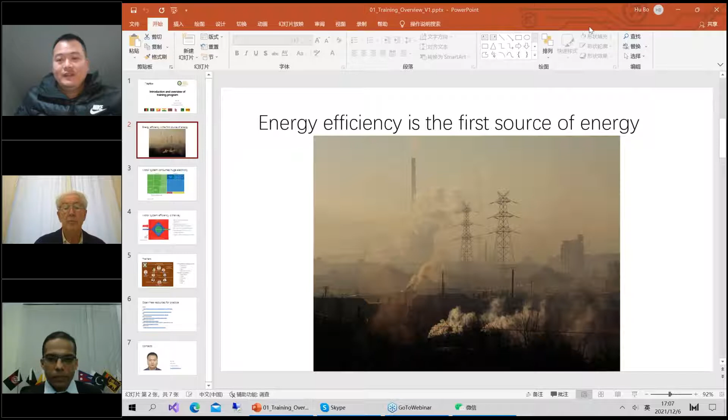That is, energy efficiency is the first source of energy. Previously energy efficiency was considered something different, but right now we consider energy efficiency the first source of energy, especially in the EU and also in China, in the policy context. Energy efficiency has been given high priority in the policy context. I know that there are some officers from the South Asian countries joining us. I hope that this can also be good in your future work.

Second is why motors, because motor systems consume huge amounts of electricity. This is research from UNEP's U4E program.

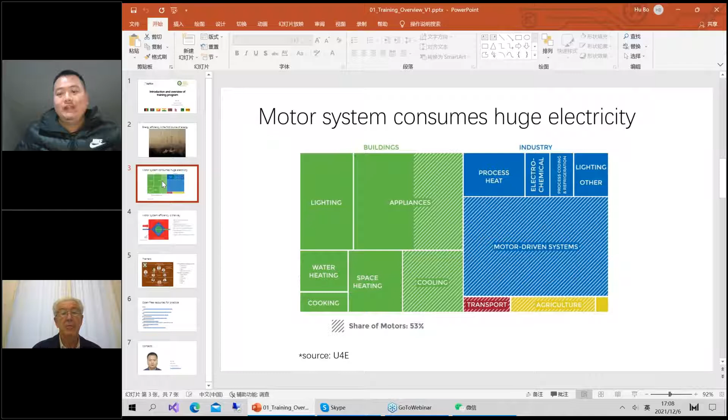The motor system consumes more than half, 53% of the global electricity. I think this graph will be shown again and again by other speakers, by other trainers. They will show you how important the motor system is, because it consumes such a big share of the global electricity and also energy. Second, this graph is actually from Conrad, whom I cited at the very beginning. I found it in his presentation; he does not show this graph, but I think the most important point is that motor system efficiency is the key.

Based on this concept, because I don't know the background of the trainees from this South Asian region, I designed the topics or subjects for 5 days. The first day is for the system approach. The second is the digital pump demonstration and training. I know that everyone has already got the schedule, but I want to explain to you what's behind it, how we designed this training schedule.

The second is the pump demonstrator. I'm involved in this development process. I want to show you the front of the demonstrator, but also something behind it. The third is for the VFD control and also digitalization from, I think, the University of Bern. And they have Vitili, the IEC TC member from Switzerland, who is quite experienced, an expert in this field.

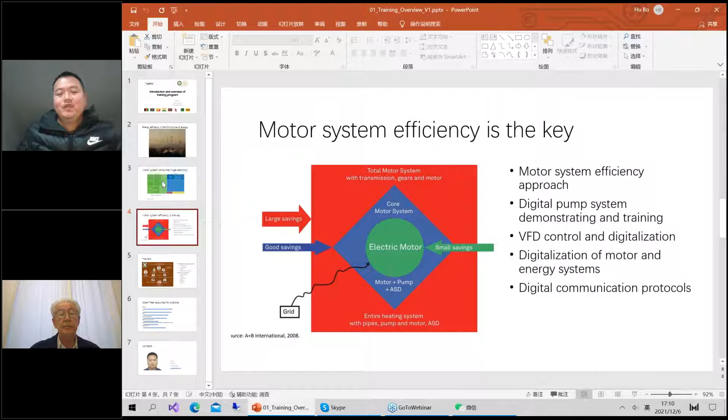And the fourth day is my solo day. So I will give you some in-depth insight into the digitalization of motors and also other IoT systems, and some industrial communication protocols like Modbus, and also OPC UA. I think the final day could be digital communication protocols with an ABB expert, because ABB invented a very creative solution called ABB Ability. I think we can learn from it.

That's the trainers' profile. I think Tula and also the director already mentioned that we have a bunch of trainers from different backgrounds. We have diversified institutes: experts from universities, from companies like ABB, from NGOs like CLASP, and also research institutes like China National Institute of Standardization, and also Topten, which is an NGO or technical consulting service company. We invited a bunch of trainers from all backgrounds.

I want to highlight that Conrad and also Andrea work for IEC, the TC committee. I think they are the front runners in this field for motor efficiency and international standardization. And also China National Institute of Standardization; they are quite pioneering in this kind of process. Of course, we have speakers from a lot of countries. I don't want to repeat it, but we have speakers from China, from different time zones, from morning to afternoon or even some evenings. I think that's a combination, and that's my perspective of the training.

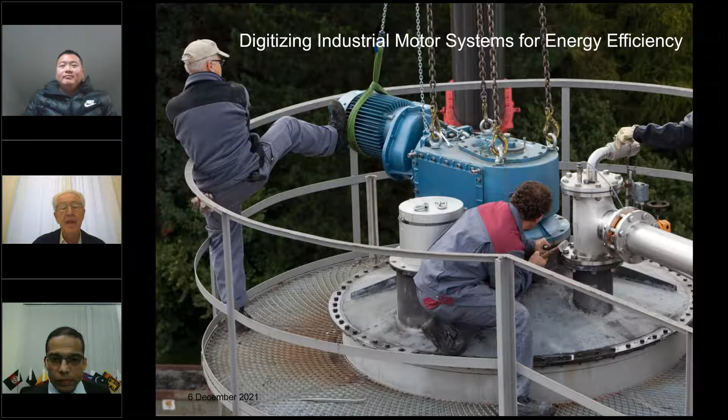My topic is the introduction to the 5 days training. It's under the title of Digitizing Industrial Motor Systems for Energy Efficiency. And you can see on my introductory slide a motor and pump installation being mounted on the top of a big purification plant. Now, I chose the title Efficient Electric Motor Systems, Overview of Motor System Energy Efficiency Improvement. And as I said, my name is Conrad Brunner. I'm an energy efficiency advisor since many years. Therefore, I have many gray hair, and I'm based in Zurich, Switzerland.

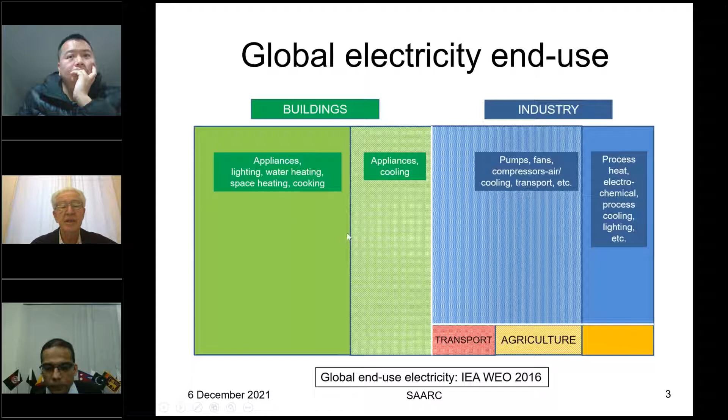This is for you to understand the use of electricity worldwide, global electricity end use. In the graph, you can see on the left side a part which is greenish, which is the electrical energy consumption in buildings. On the right side, you can see a part which is bluish, electricity consumption in industry. And below, you can see a smaller part in red, transport energy use, and agriculture, a little bit bigger electricity use. The big use is in buildings, in appliances for cooling, and in industry for pumps, fans, and compressors, and for process heat.

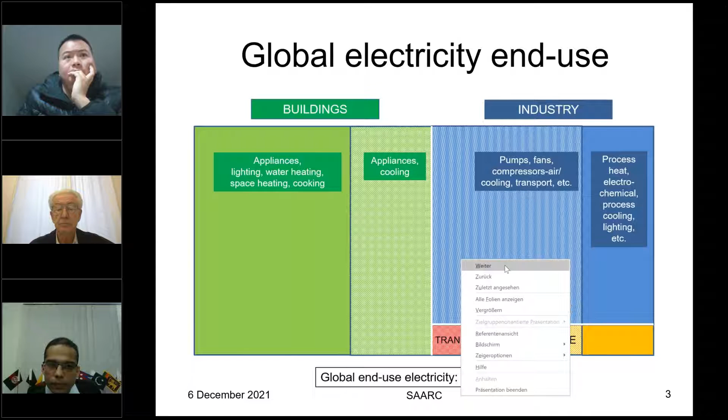When you look at electric motor systems, you can see within the dotted red square, this covers the part of the buildings which is appliances in cooling. Every refrigerator, every air conditioner has a compressor, and the compressor is driven by an electric motor. It covers a large part of industry with the pumps and the fans, the compressors for air and the compressors for cooling, and mechanical transport movement in industry. And it covers a large part of electricity use in transport and a part of the electricity used in agriculture.

Now, the red dotted square, according to research done by the International Energy Agency, is 53% of the global electricity use in the year 2016. I don't think that this number has changed. This number can be different in different countries. It will be higher in very industrialized countries. I think the number in China is up to 56%, and it is lower in countries which have a larger share of services. Then it might go down to 45%. I think each of your SAARC countries have around 50 or 53% of electricity used for motor-driven systems.

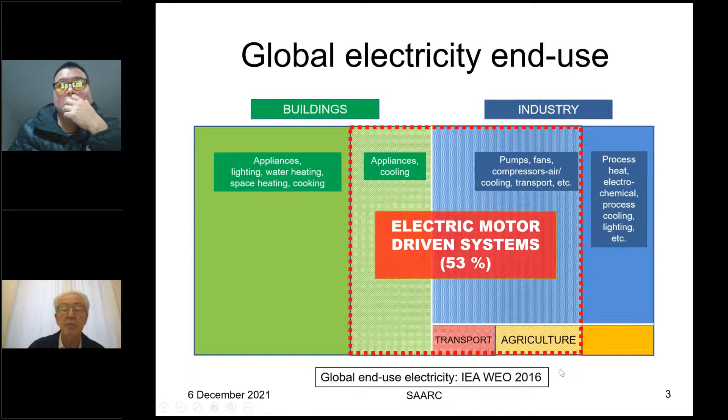This means, of course, motors are the big chunk of electricity to be used, and motors are the big topic once energy efficiency is the main topic. This doesn't mean that we shouldn't talk about lighting. This doesn't mean that we shouldn't talk about electrochemical and process heat, but for today, I think we have chosen the big chunk, the motor-driven system, as the topic.

I've said already that 53% of global electricity is used for the motors, and the last number is important. I think Rolf Tieben will then go into more detail. When you just look at industry, the share is about 60, 70 or more % for electricity used for motor-driven systems.

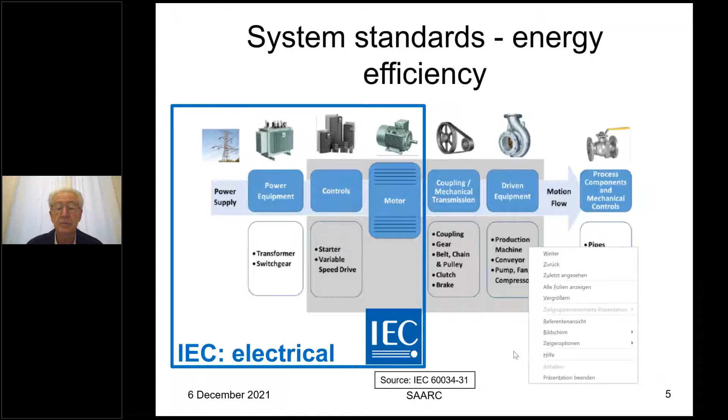Therefore, a bigger machine is always more efficient. You can also see that the differences in the efficiency from these four different classes is very large on the small side and only a few percentage on the high side. I want to explain them to you.

The red line on the bottom is the IE1 standard efficiency. These data are all based on a 50 Hertz supply, which I think is also very typical for the SAARC region. The yellow one is the IE2, the high efficiency motor. That was the standard until about the year 2000. And then the green one is today's standard for a premium efficiency motor. It's called IE3, premium efficiency. You should keep that in mind.

And then the blue is sort of the REACH standard, which starts to come into the market in Europe and in the US, and maybe slowly also in the Asian region. This is called IE4, super premium efficiency. What the curve shows is that on the lower end, in the 0.1 kilowatt area, the difference of efficiency of the four classes is from 50% to 70%. That means a 20% gain in efficiency. And then on the right side, you can see from the IE1 to the IE4, you have something like a 3 or 4% difference from the motors.

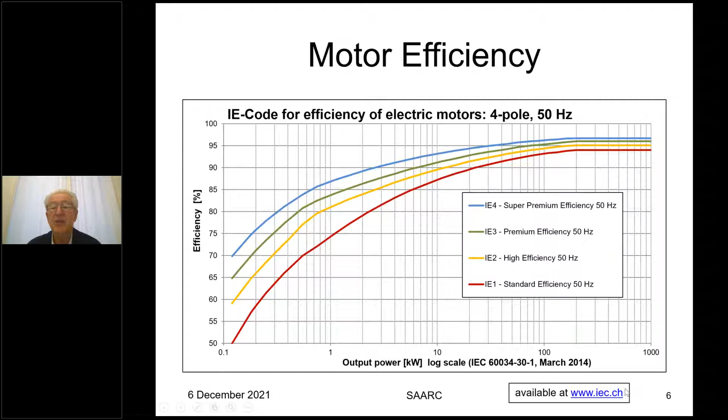And you can see, I'm sorry, I'm always jumping a little bit. You can see that at the highest level, the European Union and the UK, for a small fraction of the motors between 75 and 200 kilowatt, have announced from next year, 2022-23, to have IE4 already as a minimum requirement. That's a breakthrough in energy efficiency requirements, and I think this will help other countries to move up there in the next couple of years quickly.

And then you see a long list of countries who have adopted IE3, the premium motor, as their minimum performance standard, among them Canada, Mexico, USA, South Korea, the European Union for the smaller sizes, Switzerland, I'm proud of that, Japan, China, Israel, Singapore, Taiwan, Brazil, Ukraine, Egypt, Turkey, and Saudi Arabia.

So far, I don't see any of the SAARC countries in this group, sorry to admit. And then in the IE2, the lower level of efficiency, it's called high efficiency, but today we call it lower because this is the premium now. We have Australia, the European Union for the very small motors between 0.12 and 0.75. We have Chile, China, Peru, Colombia, New Zealand, Israel, the Eurasian Economic Union, India, and Ecuador. That means only India, if I'm not wrong, in this whole list is in the minimum requirements for motor system and only at the IE2 level.

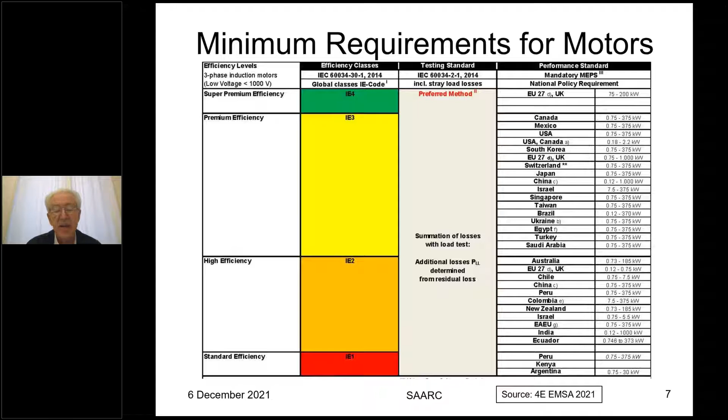the cheaper motor. And we also noticed in all countries in the world, this was like that in the US, who started the minimum requirements. It was like that in the European Union that followed. Only if there is a mandatory level for minimum requirements, then industry users will buy the more efficient motor. Otherwise, they tend to buy a cheaper motor, which is not a benefit for the future use of electricity.

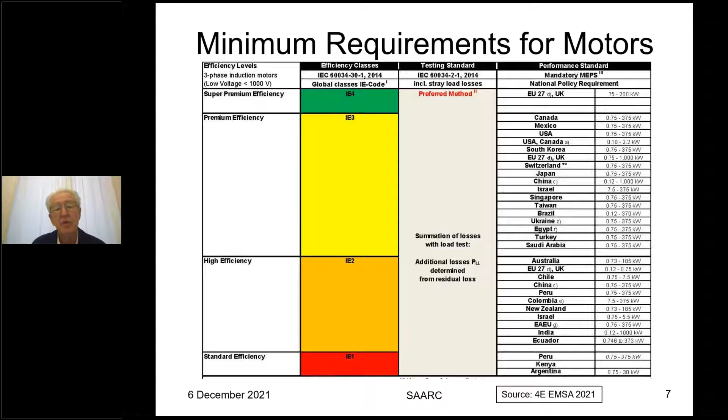Now, I want to give you 6 points that I feel are key for energy efficiency in motor systems. And this is an overview, and I'm sure the following presentations by my colleagues, the other trainers, will go into much more detail. But these 6 points are sort of the strategy behind getting efficiency for industrial motor systems. I call them industrial because the minimum motor size we talk about is 0.1 kilowatt, and it goes up to 1,000 kilowatt. But we are not talking about a very teeny 2-watt ventilator, which I have in my computer.

Point 1, design for necessary demand. Necessary demand means the pressure and the flow of your ventilation or your pump, the capacity and the temperature you have to reach. All these parameters should really be calculated or measured, and you should design your system only for the necessary demand. This leads to point 2.

If you find a machine in operation that is too big, too big means it will be operated most of its time in partial load at 50% of the possible output power, or even 20% or 10%. If it is run at lower than optimum load of the system, then the efficiency is lowered very much. Therefore, point 2, downsize all components to actual demand. Not only the motor, but also the converter, if you have one, or actually also the pump or the fan. All the components should meet actual demand, which I call necessary demand also, and then they operate most efficiently.

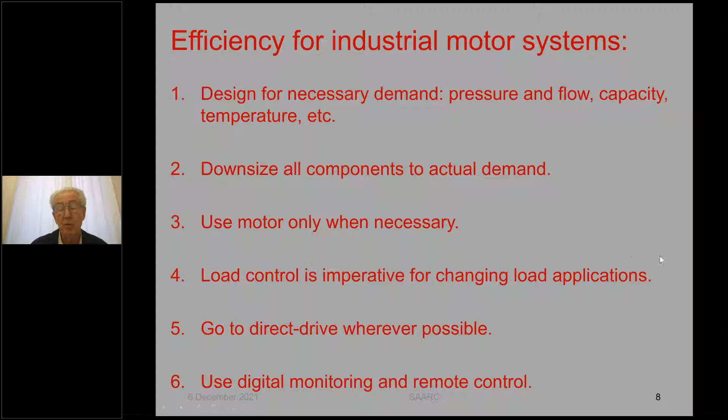Now, the good news: when you do what I say, point 2, downsize, when you use point 4, load control, when you use direct drive, point 5, you save a lot of money in the installation. Your new motor system becomes smaller, more compact, and is actually more efficient. That's what we want. Now I quickly run through all the typical applications.

This I want to show you so that you are not blinded when you go to visit industries. We visited this factory some 10 years ago, and we were surprised how nicely the motors and these cages and the pumps were presented. We found they were just freshly painted. Then we looked at their rating plates, and we found that they were produced by BBC, and the company BBC went out of business in 1988. That means these machines are over 30 years old.

They should be replaced, downsized, everything I mentioned in the last slide. They look nice, they can be recycled. Their steel can be recycled, their copper can be recycled, their aluminum can be recycled. 98% of their equipment can be recycled, and they can be replaced by smaller and much more efficient systems. Don't be blinded by nicely painted material.

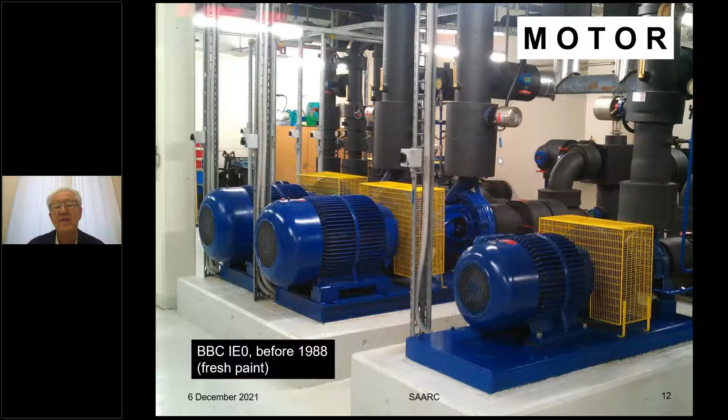Now, let's talk about the new world. Let's talk about everything which is digital. I want to call them digital motor systems, and I want to mention 4 different elements that could be in this framework of digitalization. The first element is condition monitoring. This has been done for a long time, and the goal of condition monitoring is to avoid a system failure. You want to be informed quickly whether your system performs 100%, whether it's on or off by a failure, or it shows already conditions that will shortly lead to a failure.

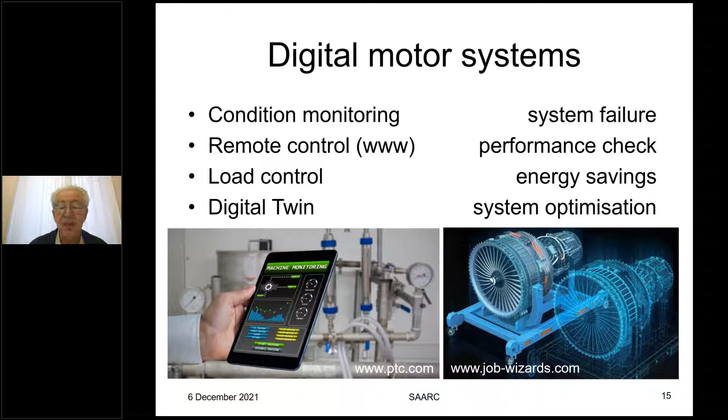This is your machine, physical, mechanical, electrical, and this is what you have on your computer. Not just a drawing of the system, but a twin in the sense that you know all the parameters of the machine. And if there is something, I'm sorry, I jump back and forth. If you have something that you don't want to have, then it's possible to immediately go at home, define where the problem is, and then jump to the actual machine and do the improvement which is necessary.

Yes, I have to go to full screen again.

So, next one is, here I'm showing you some types of digital sensors for motor monitoring. All the big manufacturers, I show you only the Brazilian from WEG, the Swedish from ABB, and the German from Siemens. All of them propagate digital sensors for motor monitoring. These are typically small boxes like this one, which is fixed on the outside on the cast iron stator. Here it's a flat box, which is mounted here on the side, and here it's a little oblong box,

which is mounted here. All of these sensors can easily record the temperature of the machine, the vibrations, and the operating time. That means on or off. Maybe I say, because all three companies are trying to reach that level, they can also check and record speed and torque of the machine. That means the actual load condition the motor is operating. And they do that by monitoring through the stator the actual electric or magnetic flux that is within the machine.

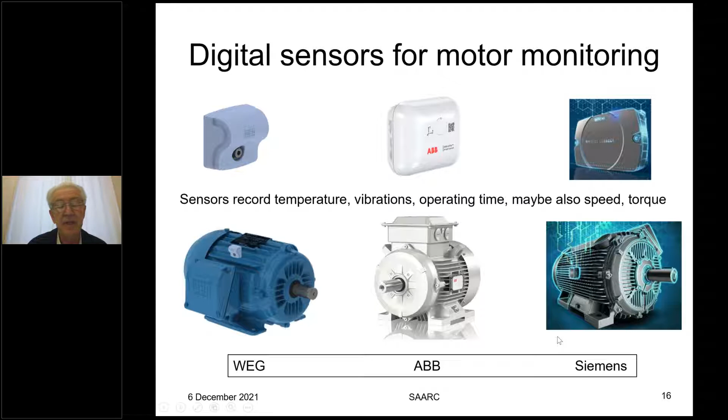All these sensors have a capacity of storing the measured data and then to relay it through the World Wide Web or through any kind of device, any kind of a system, to a central operating center where the data of performance of each of the machines can be analyzed and monitored and used and the situation improved.

Now, I want to quickly tell you what I call the number one case. The number one case has to do with the economy of much more efficient motor systems. The outset is for me any 0.1 kilowatt to 1000 kilowatt nominal output machine. It stretches the whole horizontal axis of this efficiency diagram. And it's not important. It could be a pump, a fan, a compressor, anything that rotates. That's sort of a general appreciation of what happens when you make efficiency.

Then the machine at the outset, in 90% of when we go to factories and make factory audits and try to help the owners and the operators to improve their systems, we see oversized machines. Rolf Tieben will show you some results from our analysis. We show a high degree of machines operating with fixed speed. We see a lot of gears and a lot of V-belts. And we see, of course, an assembly of current market components.

Now the system improved. I summarize the elements I've already mentioned before. You can, by measuring the performance of the machine, downsize it to the necessary level. You can introduce adjustable speed by using a variable frequency drive. We can go to direct drive by eliminating gears and belts. You can get efficient components, and you can start to use, which is now the new technology in the digitizing age of motor systems, remote control.

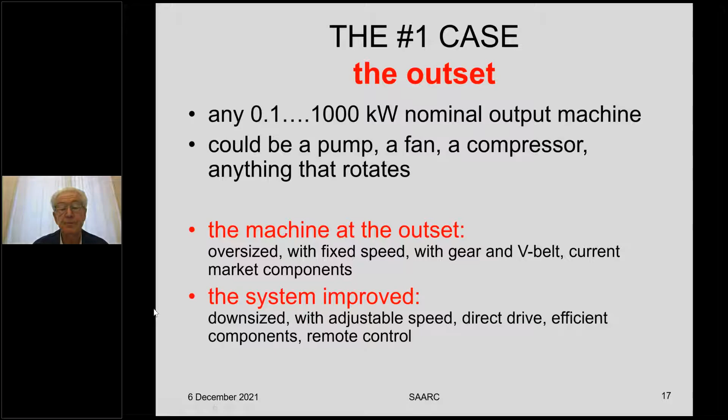Now, what does it mean? The efficient motor system means, number one, supply meets demand. Finished with oversizing. Finished with this fear that your motor will eventually not be capable of reaching the nominal required load. Oversizing is an old-fashioned, traditional approach from the time when, one, motors were very much prone to overheating and to catching fire or to burn and destroy themselves, and at the same time precise calculation or measuring methods to really size a machine appropriately were not available.

Today, the motors run much cooler, they don't overheat, they don't burn, and you have all the tools to really define the demand. Second, time of use, run only when needed, not at night, not at weekend if you don't use it.

Number three, many of these more advanced systems have standby losses. The standby losses come from motor controls, like from the variable frequency drive, from heating part of the oil of the motor and the gear. Many other things have standby losses, and especially in smaller machines, this can be a considerable part when you operate only 1,000 hours a year, and you have 7,760 hours standby. This can be more energy wasted than energy used during operation. Number four, motor connects to pump or fan directly. This is certainly an imperative for new systems.

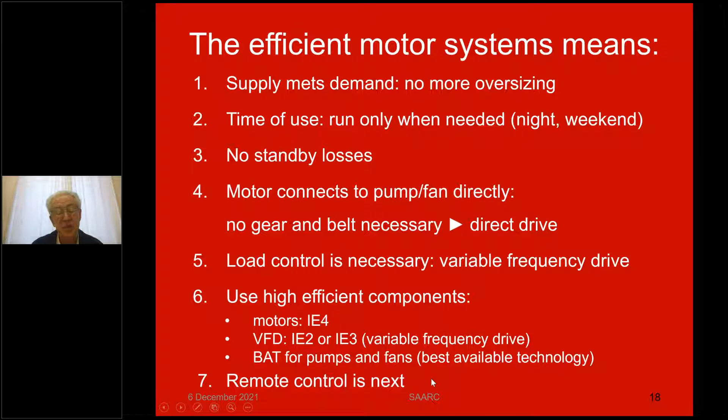Now I want to touch a final subject, which is not so important in Europe. It is very important in Asia. It's a question of repairing an existing system versus buying a new motor. I have tried to summarize all the discussion points for the repaired motor on the left side and the new motor on the right side.

A repaired motor goes into repair maybe every 50,000 hours, maybe before. It goes into repair because the bearings are not good anymore, or because you have some problems in the winding, electrical problems, heat problems, insulation problems. What do you do when you repair a motor?

First, you have to dismantle the motor. That means you have to take it out of where it actually is installed. You have to dismantle, rewind, and assemble. Maybe for this process, you have to ship it to a qualified lab and a workshop. And this whole thing takes some days or even weeks until you get your motor back, rewound, nicely greased, and back into operation.

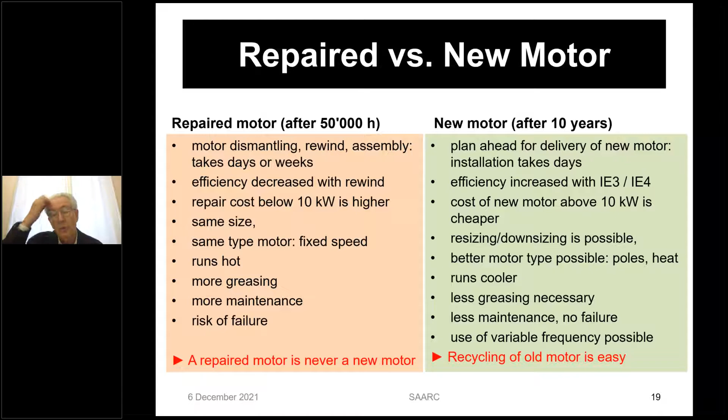Therefore, we recommend, especially for motors below 10 kilowatt, to always start with a new motor. And the last line is, when you throw the old motor out and buy a new motor, the old motor can be easily recycled. Everything you have in the motor is recyclable, except maybe the paint. 98% of the motor can be easily recycled.

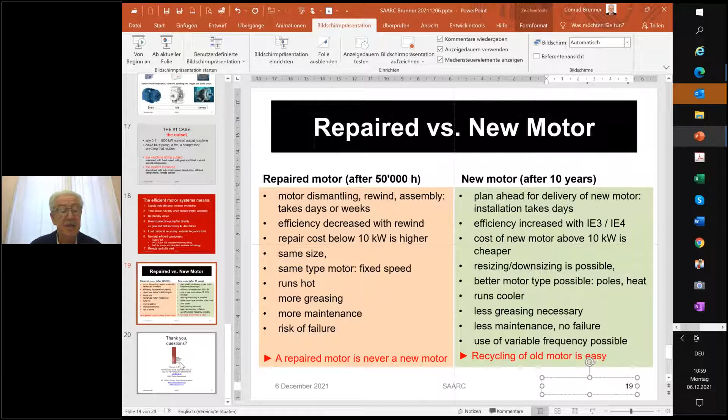Thank you, Conrad. Thank you, Mr. Brunner, for a very excellent presentation. You highlighted many important and basic things regarding motors and efficiency. Some of the points you mentioned were the industrial flow process and the interlink between the electrical and the mechanical components, and then you talked about the national policy requirements. Then you highlighted the six basic points or strategies required for efficiency in industrial motor systems.

Then you covered digital motor systems and why they are needed, like condition monitoring, remote control, load control, and the digital twin. Then you talked about digital sensors for monitoring. So it was very good. I think the participants also enjoyed it a lot.

So I have a few questions over here. Let me. Yeah.

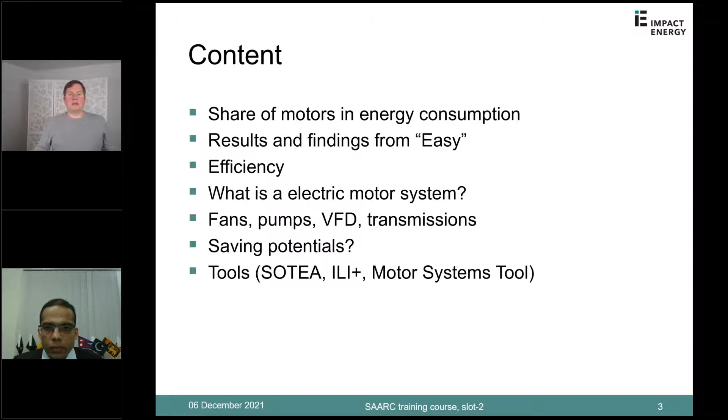We will also define what an electric motor system is, where it starts, where it ends, and we will talk about different applications like pumps, fans, VFDs, and transmissions. And we will see how big the saving potentials of all these components are. In the end, we will have a look at the SOTEA and ILI+ tool, and I will show you the motor systems tool.

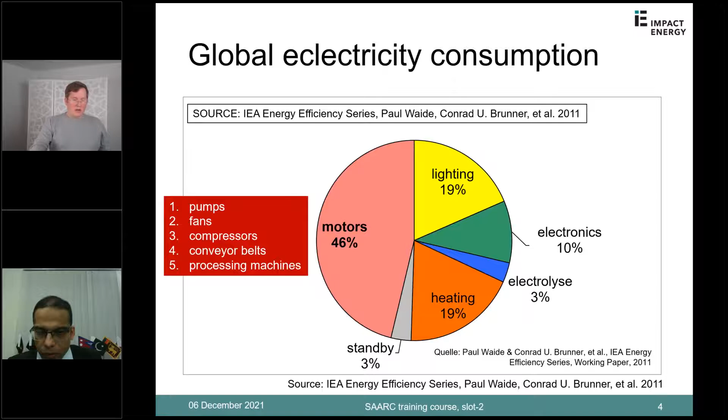We had a closer look at motors in industry in Switzerland. We analyzed 25 companies with a total energy consumption of 691 gigawatt hours per year. And we found out that 606.7 gigawatt hours of these total 691 were consumed by electric motors. In percentage, this means 87.8% of the whole energy consumption was used by motors. Only the last 12.2% was used by lighting, communication, canteen, and ohmic resistance like heating and so on. So the far biggest share of the energy consumption was caused by motors, and that's why motors are so important to look at closely, analyze, and optimize.

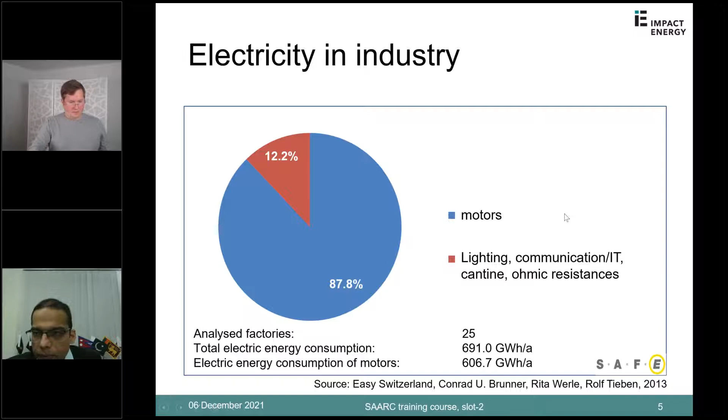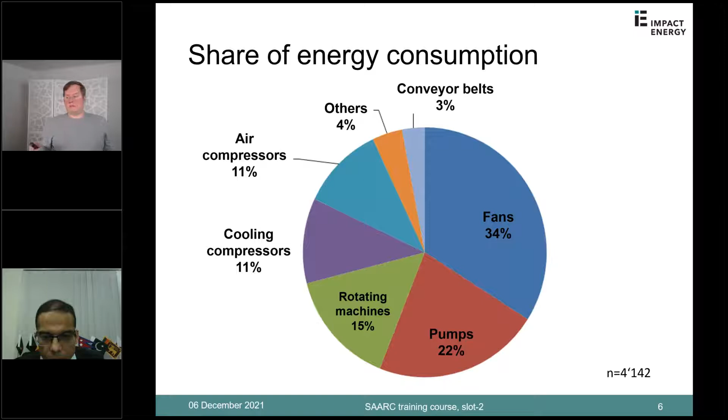So we did some analysis in Switzerland, and in total we analyzed 4,142 motors. These motors were split into several parts: 34% were fans, 22% pumps, 15% rotating machines, 11% cooling compressors, 11% air compressors, and 4% others. We had a closer look at these 4,000 motors and checked the nominal power, the average load factor, whether they use a VFD, the age of the motors, and so on. I would like to show you some findings from these analyses.

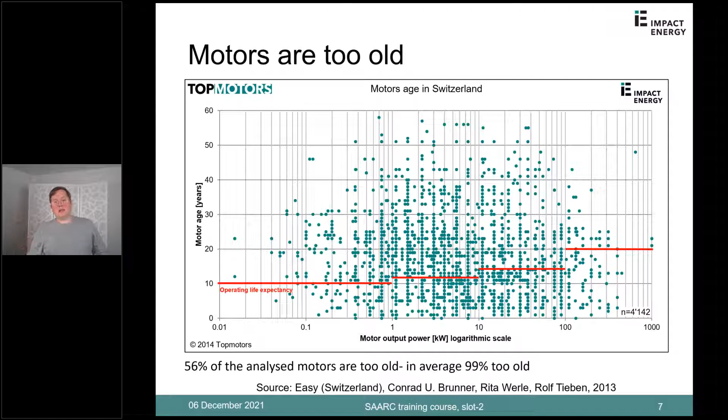So this means if you're planning a motor system, you expect it to work or to live for the time the line shows. So the small motors are expected to operate for 10 years, and afterwards they have to be replaced. The little bigger motors, 12 years, 15 years, and the big ones are expected to operate 20 years. So every dot which is above the red line is already older than its expected lifetime. As you can see, we have several dots with 30, 40, even 50 or more years of age.

So this means the motor is running day by day as it was planned 20, 30, 40 years ago. It also missed the technical development in motor technology and application technology, was probably rewound several times, had a lot of repairs and maintenance and so on. So the actual efficiency of the rewound, repaired, maintained motor today is probably lower than its nominal efficiency when it was bought 30, 40 years ago.

The total conclusion we found out was 56% of the analyzed motors were already too old, which means above the red line. And we had a look how much they were too old, and on average they were 99% too old, which means they are twice as old as they are expected to become. So if you sum it up, you can almost say almost every second motor was twice as old as it was expected to be.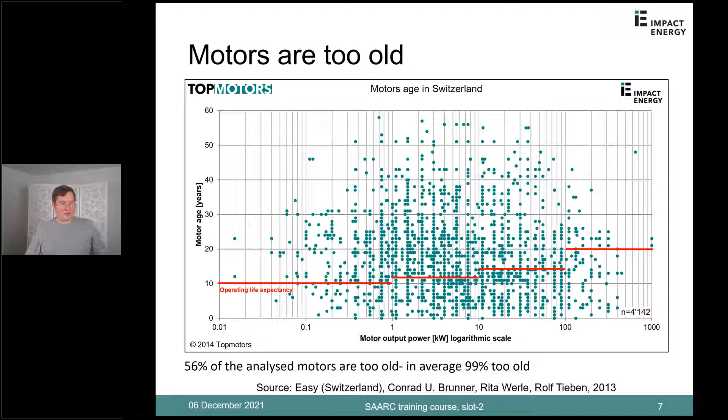Also, it makes no sense to use a modern new VFD and put it on an old motor which is 30, 40 years old. You have to check the application, the process. You have to resize and arrange all components to each other.

And if you just take an old motor, which is 30 years old, and add a VFD, you will probably get problems with the insulation. Old motors have weaker insulation in their windings, so the VFD can cause problems and short circuits in the winding. So it's never a good idea to just add a VFD to an old motor. It's always a good idea to take a system approach.

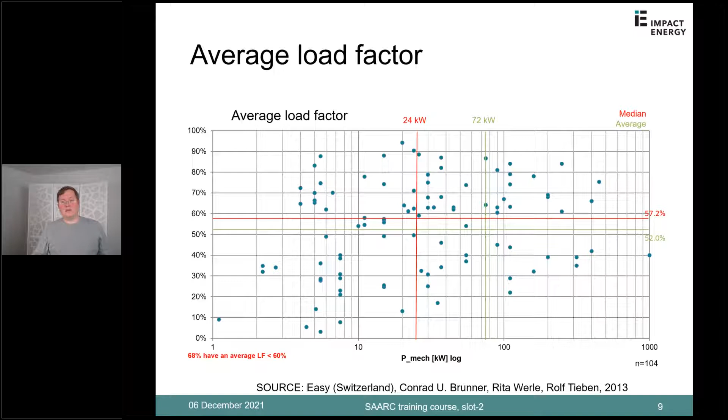So if you start with a system approach, I will explain later what the system approach is of a motor system and what a motor system is, definition. You have the possibility to gain the best energy savings, or you can reach the best increasing of the total motor system efficiency.

So to sum up, our key findings from our financial incentive program: 56% of our analyzed motors were already older than their operating lifetime expectancy, 10 to 20 years, depending on their size. 2/3, exactly said, 68% of the measured motors have been oversized, which means their average load factor was less than 60%. Only 20% already had a VFD.

We believe and we expect that 50 or even 60% of all motor-driven systems can be driven by a VFD in a good way, which means you will use less or even much less energy than before in an uncontrolled fixed speed condition.

We also found out that motors are rarely designed to meet the real needs of the process. Konrad already mentioned in his presentation, there is a historic behavior to calculate some fear. Nobody wants to be in charge if the motor system is not starting or not working properly, is not fitting every possible need the process has.

And so everybody is adding, I would say, a short percentage of fear to be sure the motor system is working. And the result is the motor system is working, but it's working in a very bad load factor, which means the efficiency in that point is not ideal and could be better.

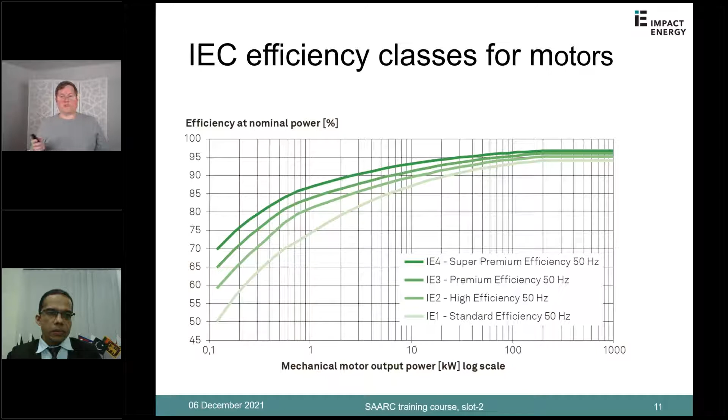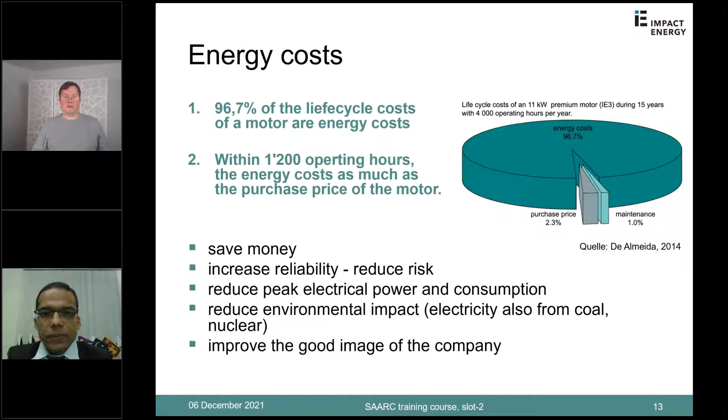So now, you do not always have the efficiency given on the rating plate of the motor, and sometimes you have to calculate. First of all, you have to know: these 7.5 kilowatts on the rating plate, is it output power or is it input power? It's an important fact to know. And I can tell you, it's always output power. This is the nominal power at the shaft, at the nominal current of 13.4 amps in this example.

So this means if you put 13.4 amps of current into this motor, you will get 7.5 kilowatts at the shaft. But the motor has an efficiency, which means it has losses. And this also means you have to feed the motor with more input to compensate the losses.

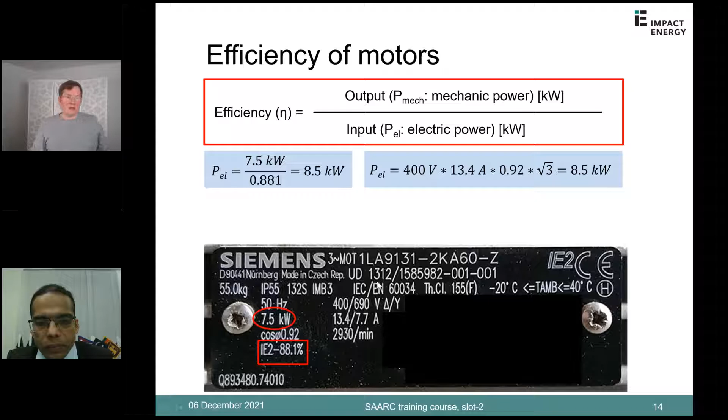Sometimes, or often, depending on how old your motor is, you do not have these 88.1% given on the rating plate. Then you can also calculate the electrical input power from all the other values on the rating plate. So if you multiply 400 volts by the nominal current, which is 13.4 amps, multiplied by cosinus phi, which is 0.92, multiplied by root 3, you also get 8.5 kilowatts.

So if you do not have the efficiency written on the rating plate, you can also calculate the electrical input power which is needed to operate at the nominal 7.5 kilowatts at the shaft. This also means if you know the 7.5 kilowatts mechanical power and you calculated the 8.5 electrical input power, you can also calculate the efficiency, which is in this case 88%, which is also given here. So if you do not have the efficiency, you can calculate it pretty easily.

In this case, it's the result of the 7.5 nominal output power, which is given here. Always remember, it's the output power, not the input power. And the input power can be calculated with this formula. And so you get two different powers. And if you divide these two different powers, you will get the efficiency.

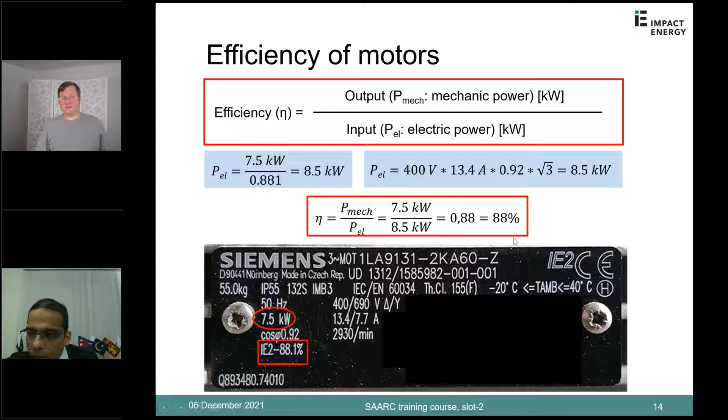And how can you optimize your motor system in the best way? The best way is to start from the end. You have to have a look at your process, at your flow. What do I really need for my process to fulfill all needs? And if you know your needs, you can resize, you can dimension all your components to the proper size and make them fit perfectly to your process. So this means you have to evaluate the required flow, pressure, time, and so on of your process.

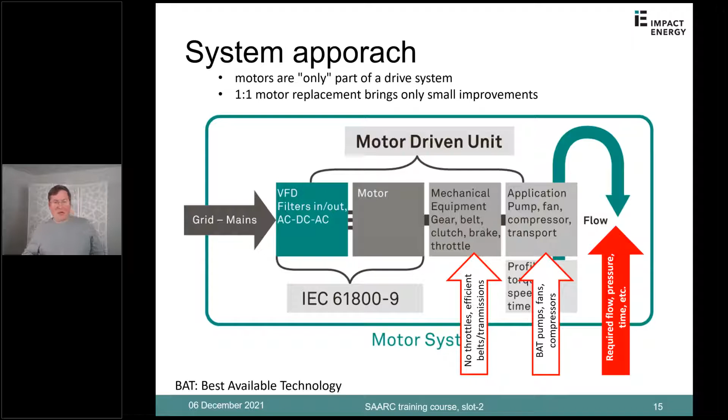You should use best available technology for pumps, fans, compressors. You should try to avoid mechanical equipment like transmissions. I will show later some examples for transmission belts and their efficiency. And you should also avoid throttles. If you have a fixed speed motor system and you want to influence, let's say, the airflow, you will use some flaps or something like that to reduce the flow if you don't need the full flow. But the better way is to use a VFD to make the motor turn slower and save energy. How much energy we can save, I will show later.

So try to avoid throttling and transmissions. Use IE3 or IE4 motors, why I already explained, and use load control whenever possible, whenever useful, to make a system turn as slow as possible to fulfill the needs of the process. And why is it so important to look at all components with all their efficiency? Because we have an efficiency chain, and all efficiencies of all components are multiplied by each other. So it's not added 1 + 1, it's always multiplied.

And this also means if you have a component with a very bad efficiency, like here, the fan area, it's 20 to 80%. If you have a fan which operates very low, 20, 30%, every other component is also multiplied by 20, 30%. And this means your system efficiency drops very low, less than 20 or 30%. If one efficiency is 20%, the total system efficiency has to be lower than 20%. It can't be higher than the lowest single efficiency. So this is why it's always important to get the best efficiency of all components by using best available technology, and also by reaching the best operating point for the application and for the component.

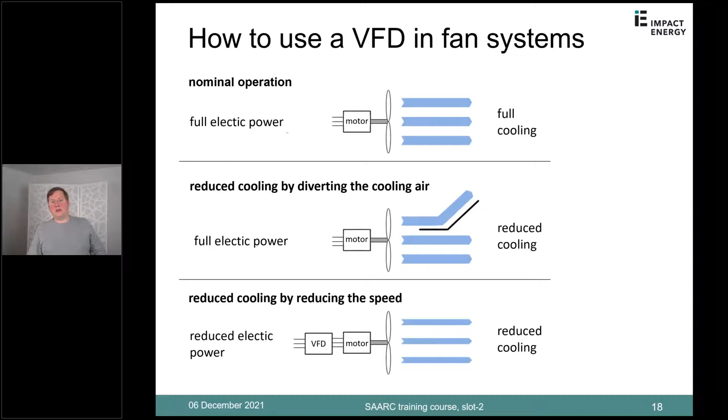diagram. We have reduced electrical input power, we have a VFD and a motor, and we have reduced cooling. We get this reduced cooling by a slower speed of the motor. The VFD is reducing the fan speed, and that's why the fan is only providing a reduced amount of flow and a reduced pressure. And in this case, I can save a lot of energy. How much energy it is, you can see in this diagram. It's a pretty important diagram, so that's why I will show it twice today.

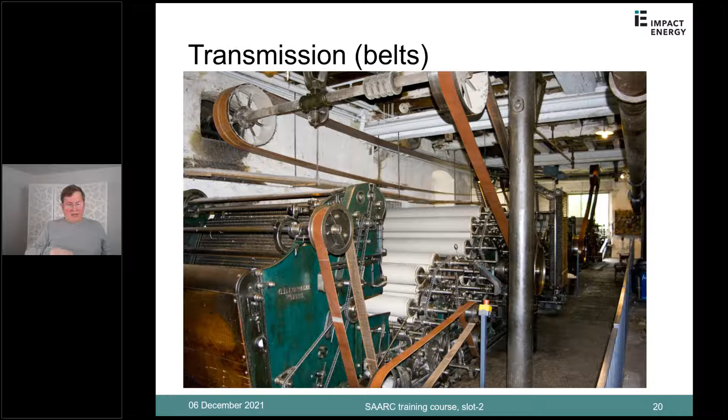Here you can see a very old machine in Switzerland with a lot of leather gears, belts, pretty old, pretty historic. That's not the actual state of today. But there are still belts in industry and pretty common, and these belts are necessary most of the time. Sometimes they are unnecessary, then it's better to avoid it and to not use it anymore.

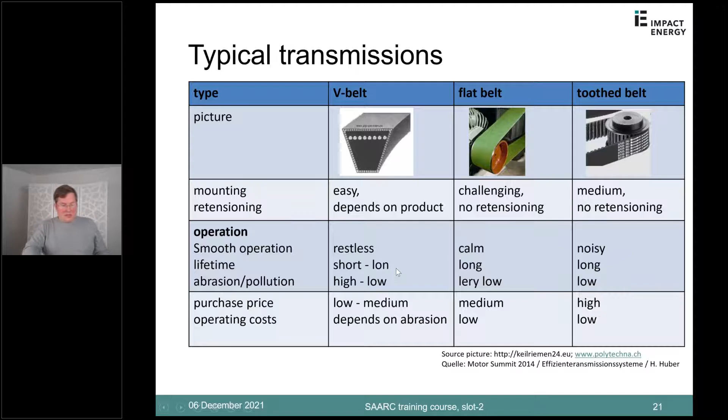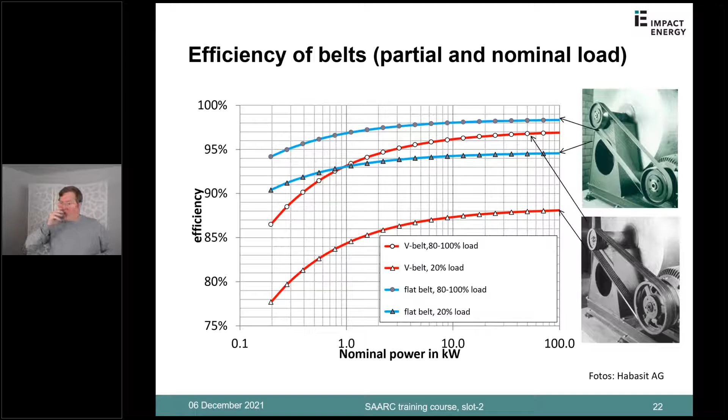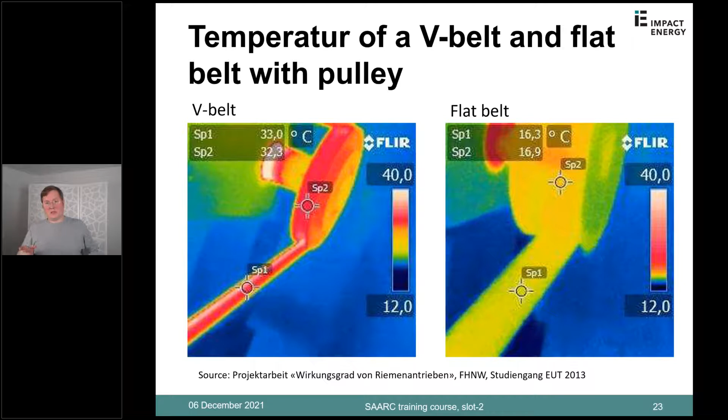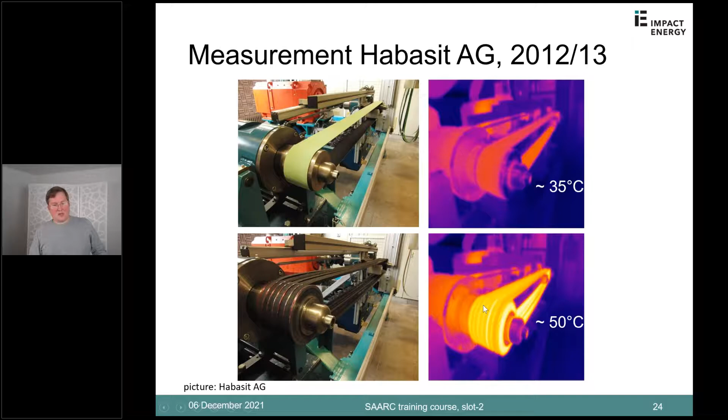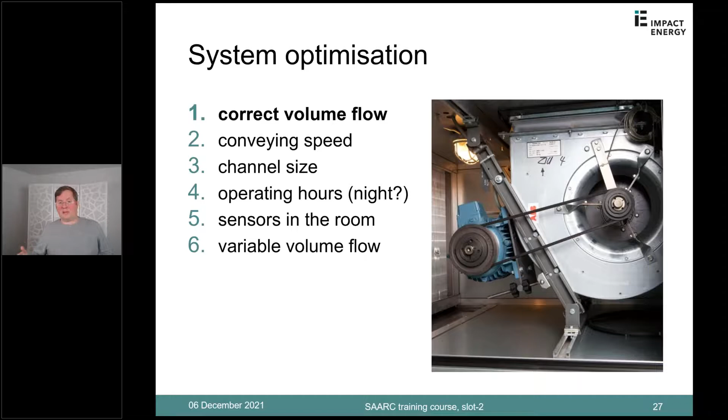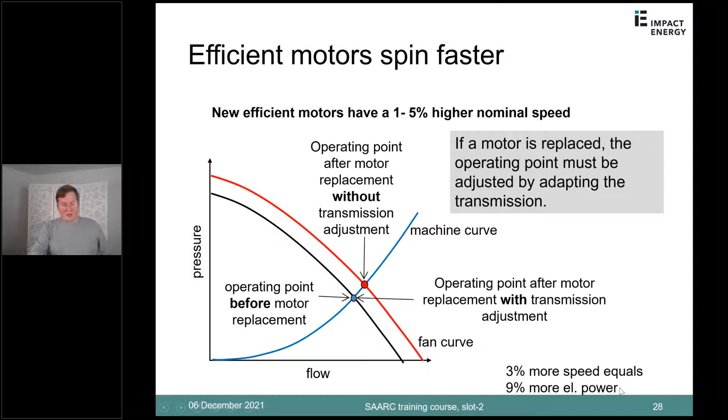But if you think about it, if you buy a faster spinning motor, you can also waste a lot of energy. In this diagram, I'm saying 3% more speed equals 9% more electric power. Just a reminder, I said I will show you this diagram twice because it's very important. If you do not adapt your transmission, your new operating point will be somewhere here, maybe 3% higher because of 3% more nominal speed of the motor.

So for the electric input, if you think this diagram will go somewhere up here, we are much higher than 100%. So we put a lot more energy in the fan system if we do not adapt the transmission. We also get more flow and more pressure, but as I said, it's probably not needed, and that's why you have to compensate. Otherwise, in a bad case, you will use more energy than before.

So how can energy be saved in fan systems? The easiest way is to optimize operating hours. If it's not necessary to run during nights, weekends, holidays, whatever, just switch it off, if possible. Always make sure it's okay to switch something off. But that's the easiest way to get big savings at almost no cost.

Another big impact has a VFD, a regulation. If you use sensors in your rooms or your facility or factories, and you reduce the speed as far as possible, you can save a lot of money and a lot of energy. With the diagram I've shown before, there is a huge saving potential, which makes it easy to save a lot of money for the optimization costs.

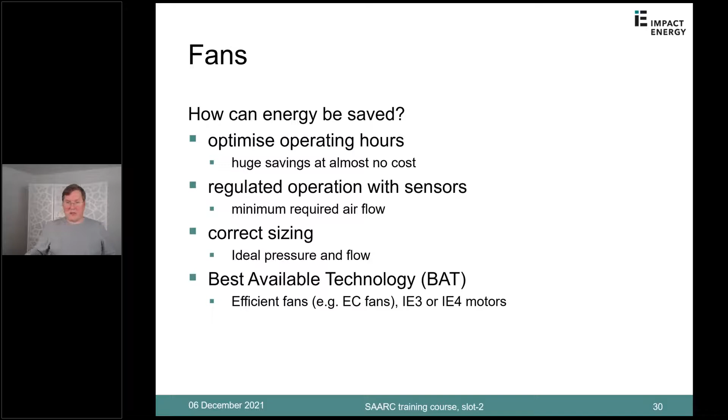If you reduce the energy consumption of your fan system by reducing the flow, there are also additional benefits which we are not calculating in money or kilowatt hours, but we always mention them if we suggest improvements, because every cubic meter you do not convey or deliver to your process, you do not have to heat or cool it, you do not have to filter it, you do not have to maintain the filters.

We have less noise. Maybe you have a better climate comfort in a company for the employees and so on. So these are additional benefits, good arguments for your boss to get the okay for an improvement, but it's hard to calculate this in numbers like kilowatt hours, US dollars, or whatever.

Now I would like to talk about pumps. In industry, there are 4 major application categories for pumps. The first one is circulating, which is just conveying a fluid like water for heating or cooling in a closed circuit. Lifting, if you pump water to a higher level, like in sewage plants or in reservoirs and so on, you just lift it up from one tank to another tank at a higher level.

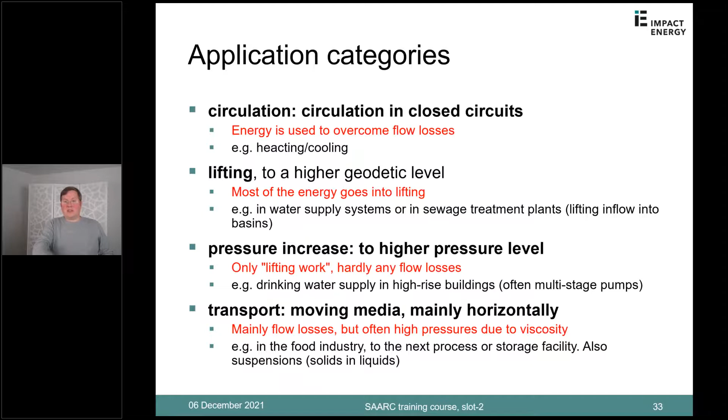And these application categories can be divided into 2 processes. One is a closed system and one is an open system. The closed system can be compared energy-wise to a fan system. A fan system is always closed by atmosphere, and a closed system with pumps means that water is pumped in a closed system for cooling or heating and so on.

And how large your pressure losses are is the task of the planner. He knows all the pipes and all the lengths and all the bows and so on, so he can calculate the total losses of the pipe grid, and that's important to know when you are resizing or sizing a motor for a closed system.

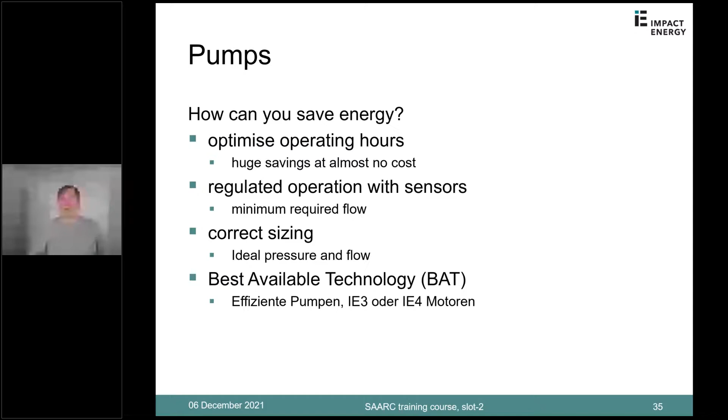To have a good overall efficiency and system efficiency. And again, use best available technology. Technology for motors, and also like in this case for pumps. So systematic approach. Now we know how to optimize and what to optimize, and if you come to a company with, let's say, 1,000 motors, how do you know

Hello, Mr. Rolf? Know where to start? Mr. Rolf? Hello? Your voice is broken, please. May we check it? Might be your internet is very poor over there. Can you message him?

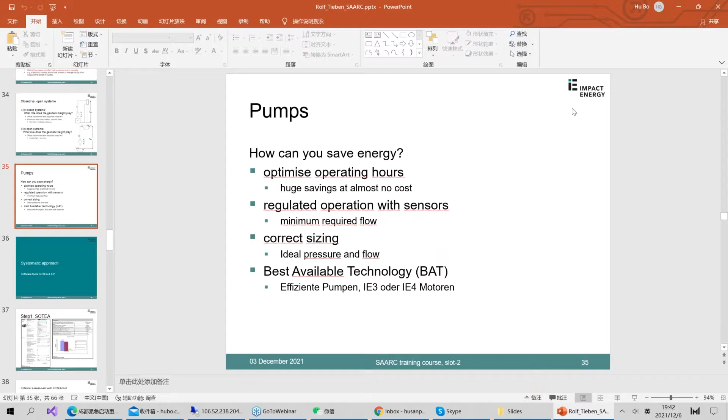Hello, Rolf. Yeah. Maybe you can appoint me as the speaker, okay? I can continue, please. Okay. Yeah, please go. You continue, please. Okay, I will continue. If Rolf is there, then he will reconnect. Can you see my screen now? Yeah, perfect. Please go ahead.

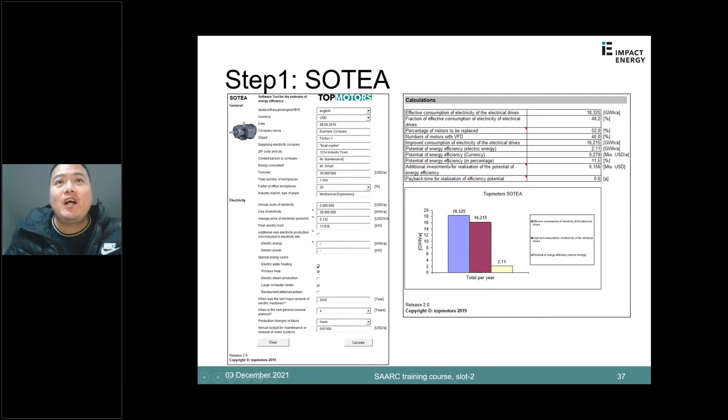And this is the SOTEA software. If you open the Excel file, you can change language, currency, date, company name, and then you can fill in all the data that's needed and calculate. From this calculation, you can see this factory's energy consumption, and also the fraction of the different power sectors, and finally you have the Topmotors SOTEA energy system. Here is energy consumption. Here is optimized energy consumption. Here is saving potential. Here you can see the potential of energy efficiency in percentage. That means you have 11% efficiency improvement in your factory in future.

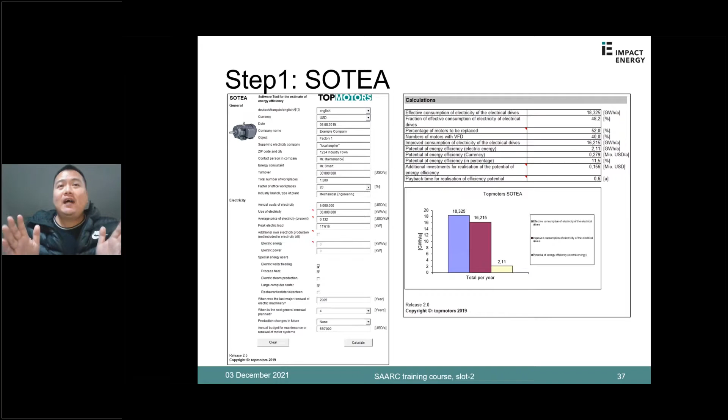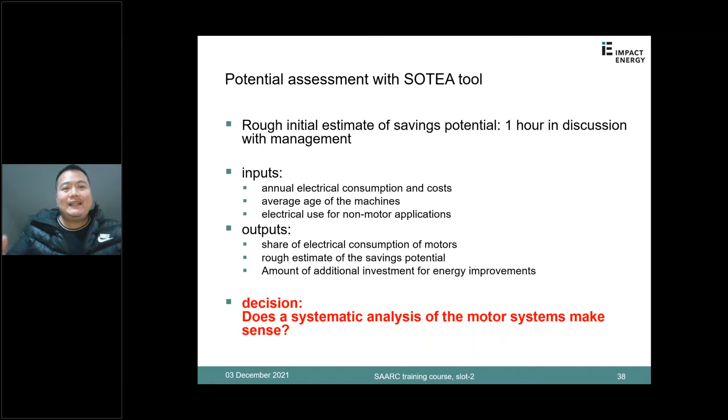Now you can see, okay, if 11 is a good value, then we decide to invest in this kind of efficiency improvement. This is the first step: to get a general understanding of the saving potential of the motor systems in your factory. It's rough initial thinking. Inputs quite simple, output quite simple. Finally, you have to make a decision. Does a systematic analysis of the motor system make sense for your factory? You decide to or not. Then you can calculate saving potential. It's roughly a tool.

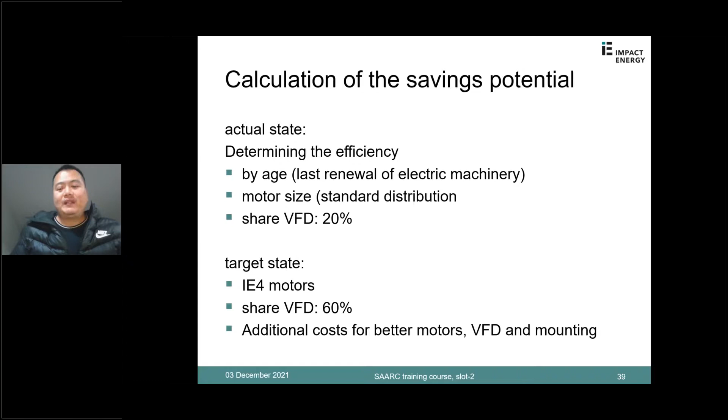By just general assessment, you can determine the efficiency by the motor age, like Karen mentioned several times. Also motor size, big, small, medium, and also whether you use VFD or not, the VFD application rate. Then finally, you will see that the ideal state is to use IE4 motors. The share of VFD should reach 60%. 40% could be constant load, but for the rest, 60% is supposed to use VFD to reduce energy. Finally, you have some additional costs: better motors, VFD, and mounting. And this is a customized input.

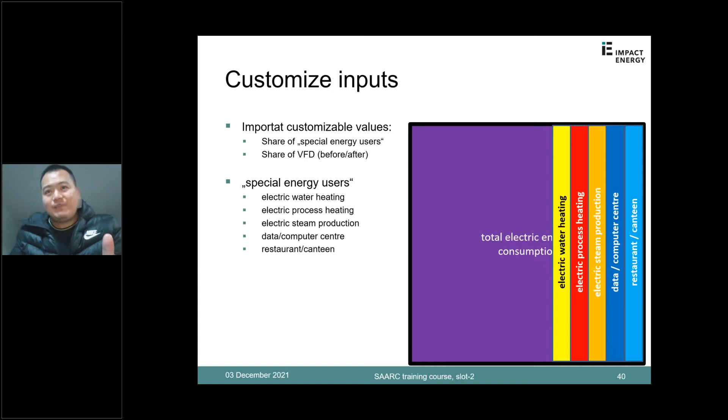Then you can see from the total energy consumption, you can gain the efficiency from right to left. Then you can gain the efficiency, and also tap the energy consumption potential from the factory. Okay, that's the total electrical. And this is Sortia. I already mentioned Sortia. You have several steps. First, fill in the data, fill in the forms.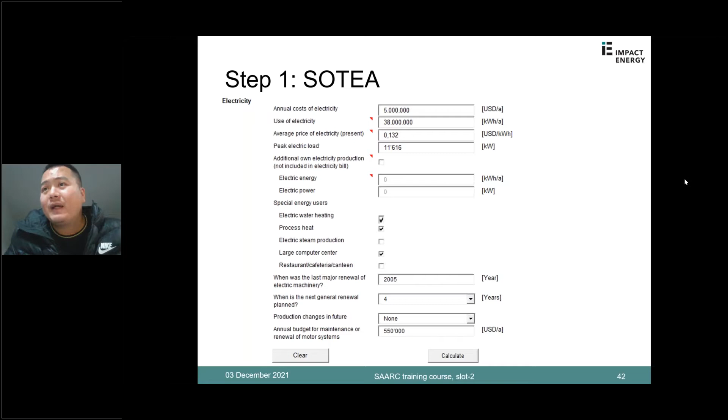Second is, let me check whether Rolf is back, because he is the person who prepared the presentation. I worked with him several times. I know this more or less.

And then you can get the result. In the result, the most important is how much you can save. This is 11.5%. Okay, and then you can use some estimation. You can input things like the currency information, the electricity price, and also maybe some employee cost. Then you can make some initial assessment whether you would like to invest your engineers' time and maybe some other financial resources in motor system efficiency in future. That's the initial decision tool.

Okay, and the second step is ILI Plus. ILI Plus is actually called the Smart Motor List. With the Smart Motor List, you can list all your data. You can list all your motors from the factories, and then you can select the most potential motor systems from your factory. You can see from the inputs the nominal data of motors, such as the power and also the age, the operating hours, and also the VFD present.

Then it can make some initial calculation, and you can get some result. The most important is identification of the biggest saving potentials. For the initial assessment from the motor list, you have some criteria to select the motors. The first one is age. The older the age, the higher the potential, because older motors have some low efficiency technologies. Also operating hours, and also the VFD. You can use a VFD to change the system.

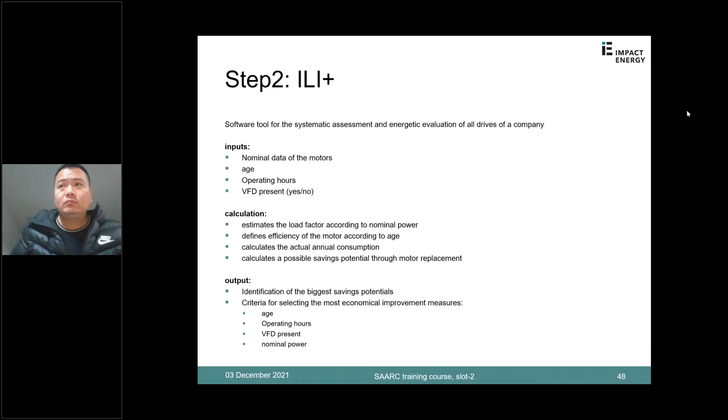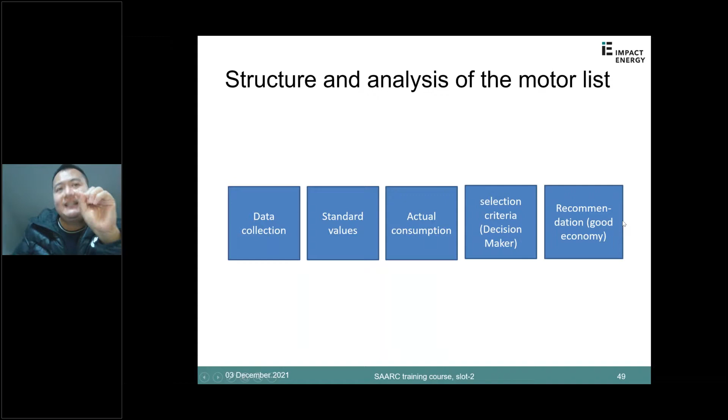And second is nominal power: big motor, big saving potentials. Then you have to follow the steps. First is the data collection. Then you can check standard values. Then you can calculate actual consumption. Then you can use the selection criteria for the decision maker. And finally, you can make a recommendation. Then you can see whether it's worthwhile to invest in this kind of retrofit project of the motor system.

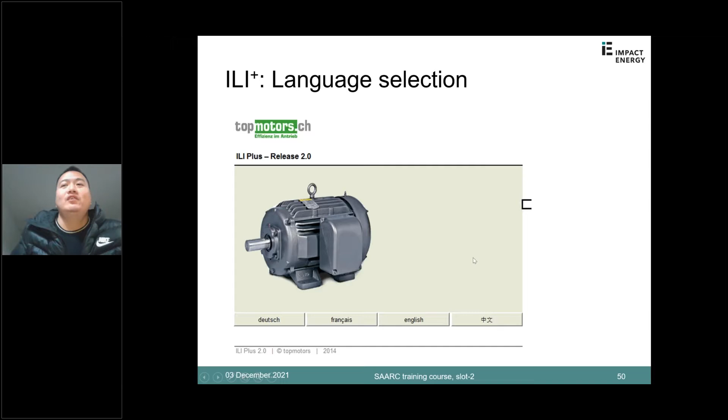And this is the language selection, when you open the Excel file. You have the choice of different languages: Deutsch, French, and English, and also, because I'm working with them, a Chinese version. Of course, you can choose the English version. Then, second, you have the interface of input, the menu. First, basic data. You can input some basic data. Then the decision maker, with selecting criteria to select a product. Finally, you can get some result on the right side.

First, you have to input some basic information of the company, factory, building, something like this, who did this filling of the motor data, and also the energy consumption, and even the electricity price. Then you can choose different currencies from different countries. I think you can choose USD, and then apply. Then in this interface, you can input all the motors in your company or your factory.

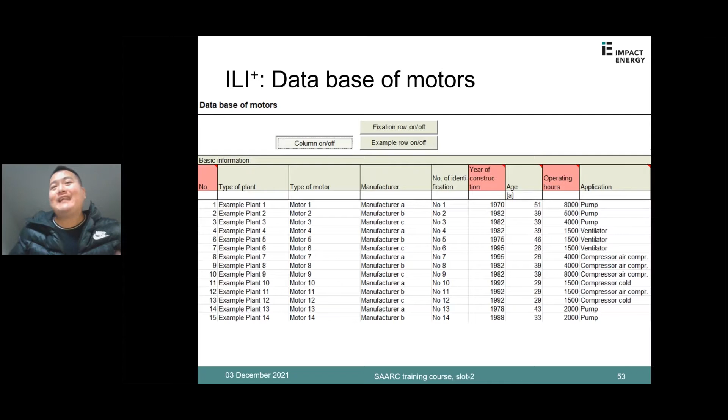The first one could be the type of plant, the motor name, and also the motor manufacturer, the identification number, and then the year. I think this is most important: in which year your motor was put into use. This is one case from Switzerland. One motor was put into use in 1970. It has aged more than 40 years. The age will be calculated automatically, and also the operating hours. If its operating hours are long, that means it has high saving potential.

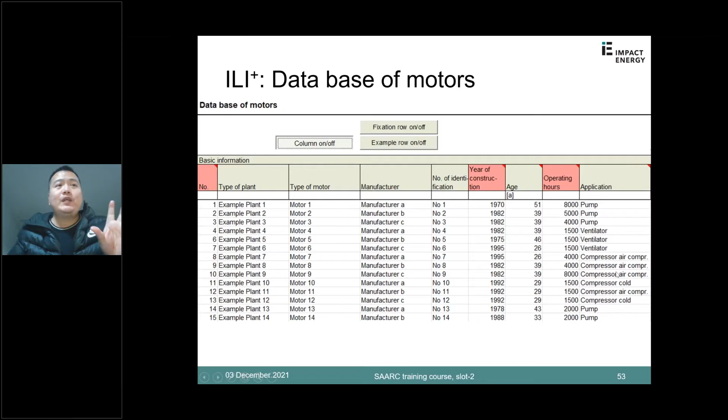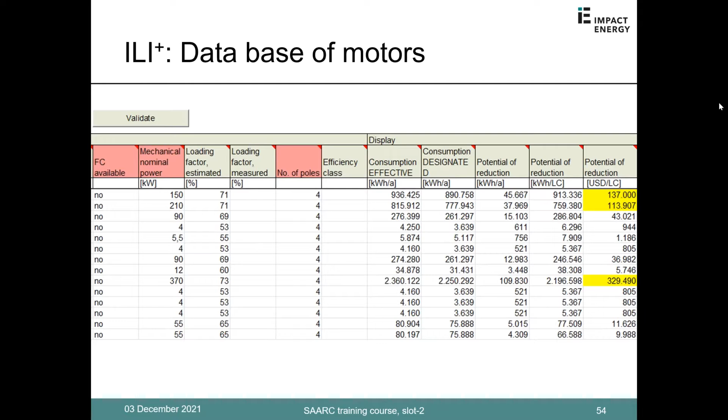And also here is the application. It applies to pump, ventilation, compressed air. Then you can decide which one you use. And then finally you can see the mechanical nominal power: the higher the power, the higher the saving potential, and also the loading factor. Rolf already mentioned the loading factor decides the operating efficiency of the motor.

This is estimation. This is the loading. Actually, you can use some meters to measure this. And also number of poles. I think most of the motors are 4 poles, and also the efficiency class. And then finally, you can choose some. This is the initial calculation result, the consumption, and also designated, saving potential.

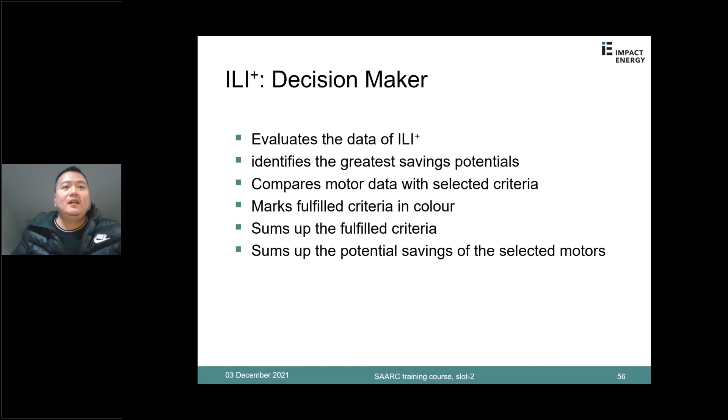And then you can use the decision maker. The decision maker evaluates the data. It identifies greater saving potentials from the initial calculation, and compares the motor data with selected criteria. And also it can make different colors for different motors. And then we can use the decision maker.

After the decision maker, you can see that we can set some criteria. These are the default values. These are my values. First is saving potential. Second, we want to select the motors older than 20 years. We want to select the motors operating 1,800 hours per year. And also we want the motor to be higher than 10 kilowatts, because the higher the power of the motor, the higher the saving potential.

And then whether we can use a frequency converter, which is VFD, then yes. And then we want to retrofit the pump, the ventilator, and also air compressor, and maybe conveyors, others. After this kind of selection, you can select the product from your list. This is the calculating result.

This is the process. Identify motors for optimization, because we have a lot of motors. I found one factory in China that has more than 10,000 motors. We have to identify the most potential motors from the long list. And then this is the slogan with it: 20% of the motors save 80% of the efficiency potential. We have to use a systematic approach to identify that 20% of the motors. I think that's the process.

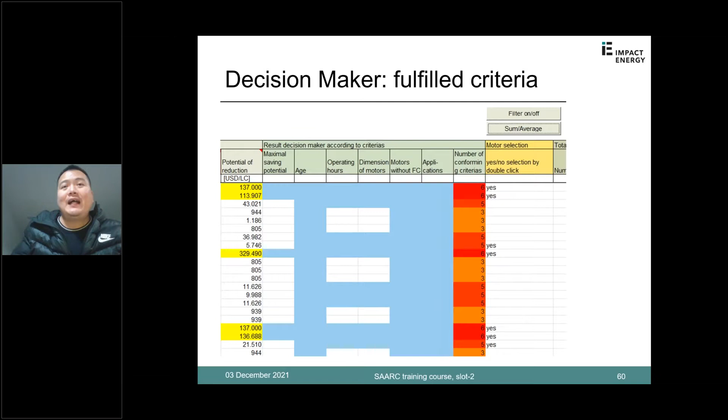That's the criteria. Then we can see how many points it meets. That means it meets 6 criteria, 3 criteria, 5 criteria. Then we can manually check whether it will be further analyzed. Yes, then we can export. We can filter on and off. Then we can see which systems we want to further optimize. Then we can do further analysis, export the result and also make a summary. I think that's the process.

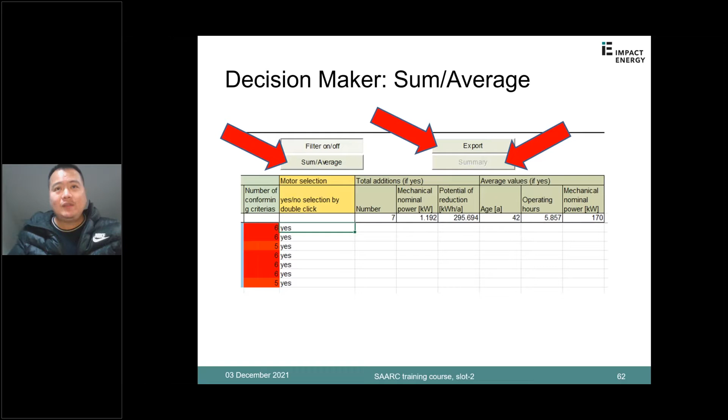Finally, when you decide which motor to be optimized, we can use a motor system tool developed by the IEA 4E Electric Motor Systems Annex. This tool was developed by the Danish Technological Institute. It's available and it's free. It's online. You can download it, and the guidelines are already there. You can follow the guidelines to measure and to input the data. Then you can calculate the specific efficiency of the system, and find a way to optimize the system.

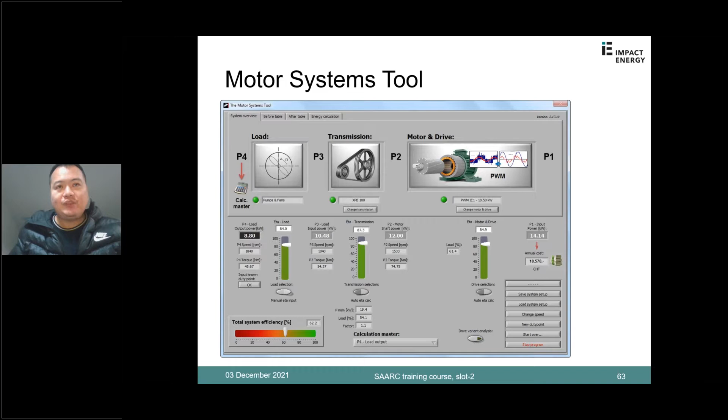I think that's the approach we follow. First, we make a general assessment. Second, we use the smart motor list to identify the most potential motors. Third, we use the motor system tool to analyze the efficiency of the motor. There is a lot of knowledge behind such tools. I think it's already available online.

You can go to the website to get the knowledge and understand what's behind, because guidelines are provided free. You can experience it by yourself. Of course, if you have any problems, you can send them back to me. There are also cases, webinar slides and webinars to teach you how to use such tools. Also the Topmotors structure: on the website you can find it. It's 10-page guided examples, where you can get a better understanding of what we're talking about today.